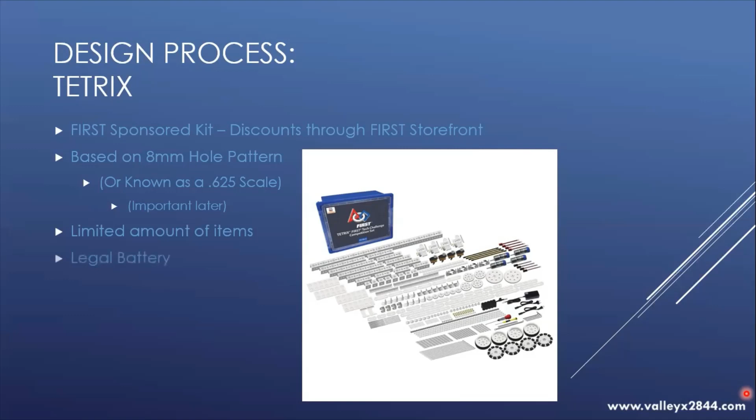With the kit parts, the first one we're going to go over is Tetrix. It's a FIRST sponsored kit, discounts through the storefront. It's based on an 8mm hole pattern, also known as a .625 scale. This is more important as we go down the list. The downside to it is it's very limited on the amount of items within the kit, but they do sell one of the legal batteries for FTC.

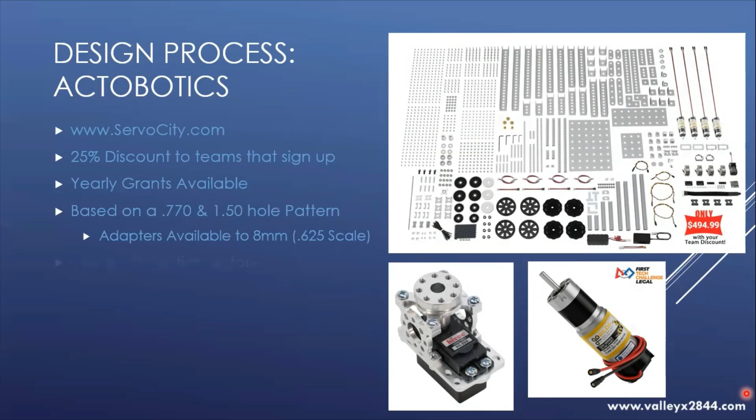Actobotics, which is a very big favorite of ours on our team, is from Servo City. They offer a 25% discount for teams that sign up. They offer yearly grants. They're based on a .770 and 1.5 hole pattern, but have adapters back to that 8mm or that .625 scale. They also sell the modern robotics motors.

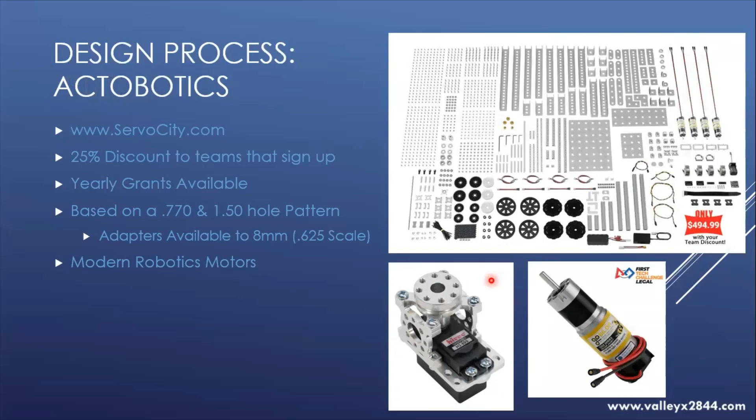One of the big items that we like on my team is the servo blocks. Servo blocks will save your servos from being damaged for the most part, depending on how you design your robot. But using a servo block, even if you aren't using Actobotics, will save your servos a tremendous amount of pain during the season.

GoBuilda, which is also the same company as Actobotics, is their metric version. You can find it at gobuilda.com. They also offer a 25% discount to teams that sign up. There's yearly grants that they give out, and they're based on an 8mm grid pattern. If you notice, that 8mm grid pattern is quite popular in FTC. They also sell the modern robotics motors that are legal in FTC.

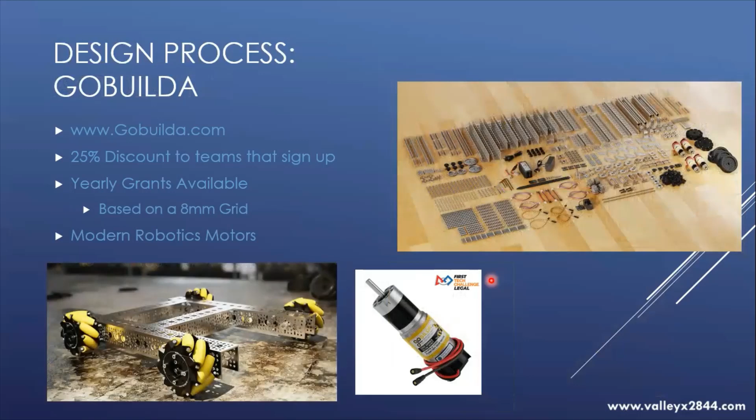We then get into Rev Robotics. Rev Robotics is a FIRST sponsored kit with discounts through the storefront. You can find more parts at revrobotics.com. In 2020, they're offering $25,000 in sponsorship grants that are available on their website. And they're based on an extrusion channel bracket system that also has an 8mm hole pattern to it as well, to allow you to cross-work different types of kits. All of these kits semi-work together based on the 8mm hole pattern. Takes a little bit of work, but you can definitely mix and match a lot of these different kits.

The difference between Rev Robotics and everybody else, they're based on a 5mm hex-based system, which means you have a minimal amount of set screws. And if you ask any veteran team out there, you will know that set screws are not your friend. They have motor and gearbox options available, and those motors also come with that 5mm output shaft.

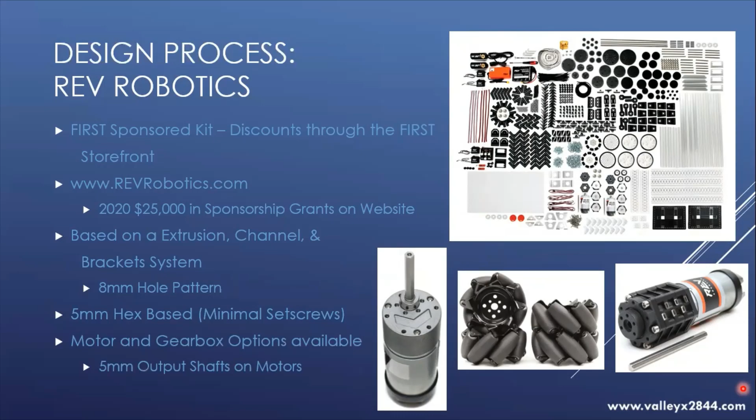AndyMark.com, which is also a FIRST Kit of Parts sponsor. You have the prefab TileRunner kit that you can buy from them. That comes in either a 6-wheel drivetrain, a Mecanum drivetrain, or a couple of different other options. You can see that right here up in the top.

They have multiple wheel options. Our favorite are the Stealth wheels. And even as a coach, these are some of the cheapest option wheels on the market and are some of the best wheels on the market. You can also get sprockets and different motors from a 3.7-to-1, 20-to-1, 40-to-1, and 60-to-1. They're typically stronger than your Tetrix motors in general, and are also based on an 8mm hole pattern.

As I said, there's multiple wheel options available. Let's take a look at the Stealth wheels here. You've got a gray, black, blue, green, and orange. If we look at the gray, those will last you more than one season. You could probably get through multiple seasons with those. The black will last you a season, and the blue will last you an event. I do not suggest driving the green or the orange wheels on your drivetrains.

At Valley X, when we drive with a 6-wheel drivetrain, we go with the black and the gray ones. If we know that there's a pushing match, we may switch to the blue ones. If you're going with a Mecanum drivetrain, at least with AndyMark, I would suggest the HD wheels. They do offer a much cheaper set of wheels, but to save yourself some heartache and pain, please don't go with these, as they break quite easily, especially in matches that have defense.

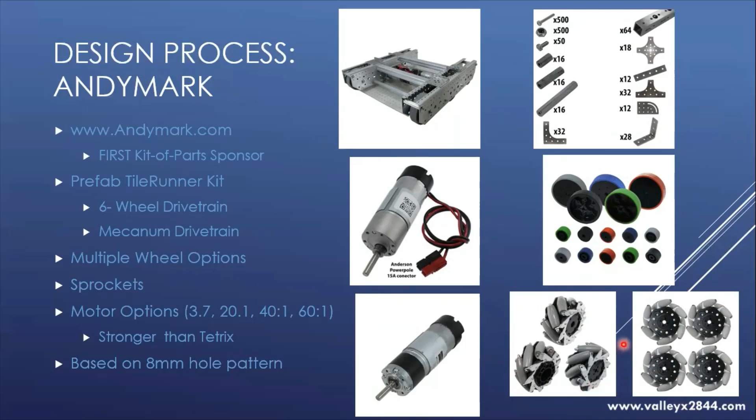Then we're going to get into the pros and cons of a kit of parts versus a custom build robot. What are some pros of a kit of parts? It's quick and easy to prototype. It's easy for more inexperienced teams. And the information is widely available online. Some cons though: the cost is usually higher and you're limited depending on the kit that you choose.

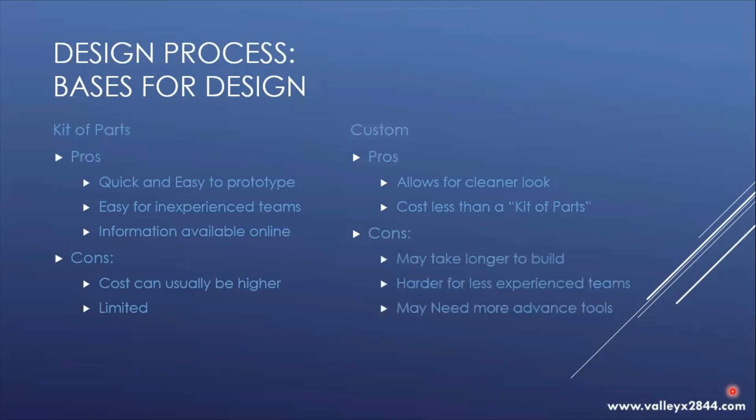With a custom, the pros are it allows for a much cleaner look and usually costs less than a kit of parts robot. Some cons though is it may take longer to build and is harder for less experienced teams. It may need some more advanced tools. With Valley X Robotics, our veteran team always runs a custom robot near the end of the year, but we also use a kit of parts for our prototyping and for our rookie team. Both ways of building robots are perfectly fine.

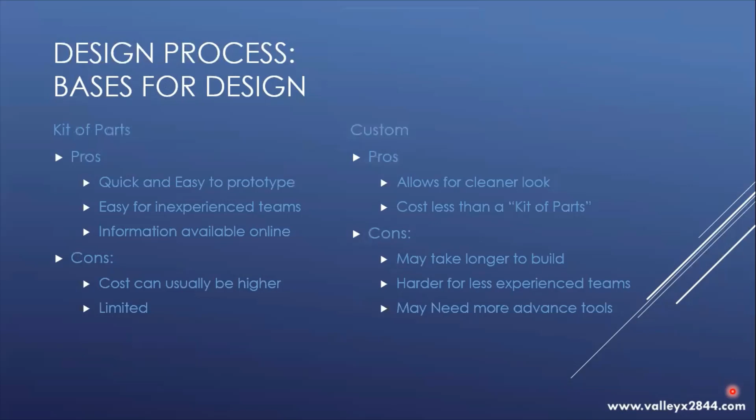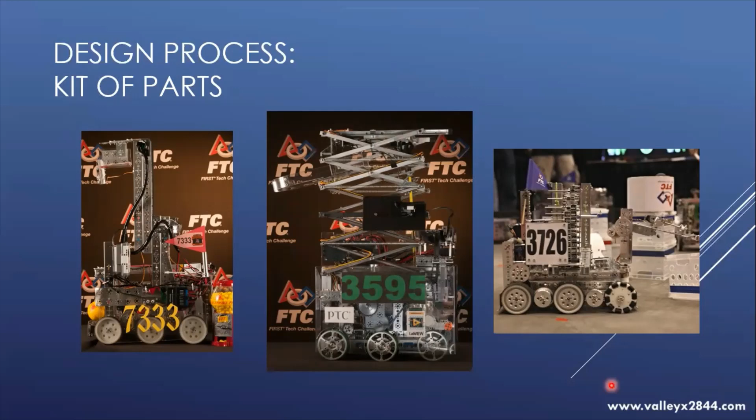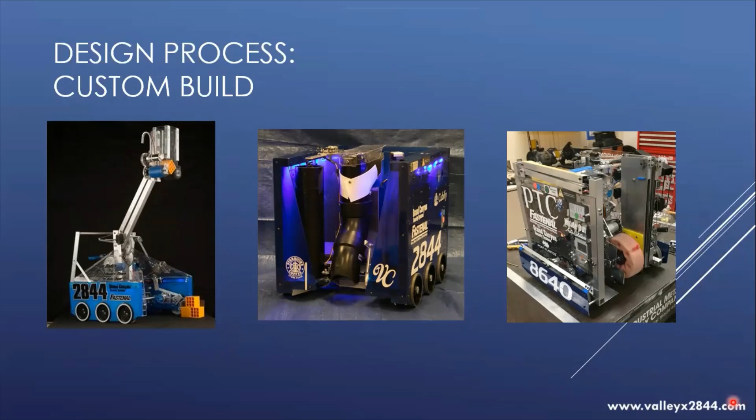Now we get into CAD. What is CAD? CAD is computer-aided design. There's two companies out there that sponsor FIRST teams, which are SolidWorks and PTC. And you may be asking yourself, why would I want to do CAD? Wouldn't you like to build your robot, test it, design it, and see if there's any issues before you ever build it, before you ever spend a dime? I know the coach's eyes just lit up.

Yes, you can completely build your robot, design it, make sure that there's no issues, and do multiple different things within the CAD software to see how your robot would look, perform, and act on a playing field before you ever have to spend one penny. Look into computer-aided design. From these two companies, you can get sponsorships and don't even have to pay for the software.

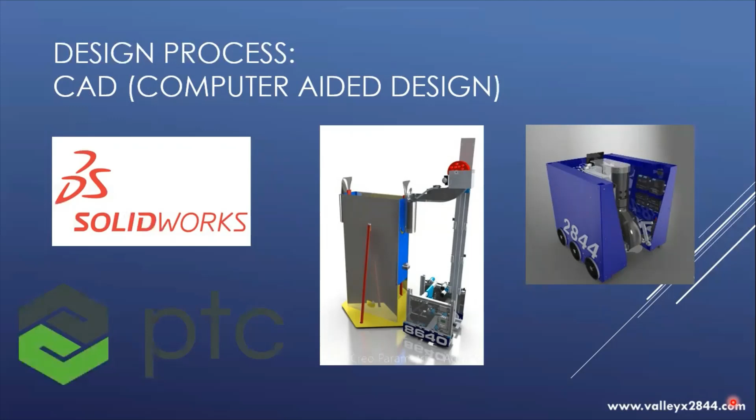Now we're going to get into SRA. For those veteran teams, you may know what I'm already talking about. It's the speed, the reliability, and the accuracy of your robot. For a robot to be high performing on a high performance field, you must have all three of these things. Without one, you're not going to perform as well as one that does have all of them. You need to have that speed, that reliability of your robot, and that accuracy of that robot and what it's doing.

We're going to put that up top, and we're going to look at design smart and smart design. And what do I mean by that? With design smart, you're going to design what is best for the manipulation of these rings and wobble goals this year. You're going to design your robot to have easy access to make sure that you can fix whatever breaks. And maybe you're going to even add adding and removing capabilities of either elements or parts of your robot, as well as the rings and wobble goals.

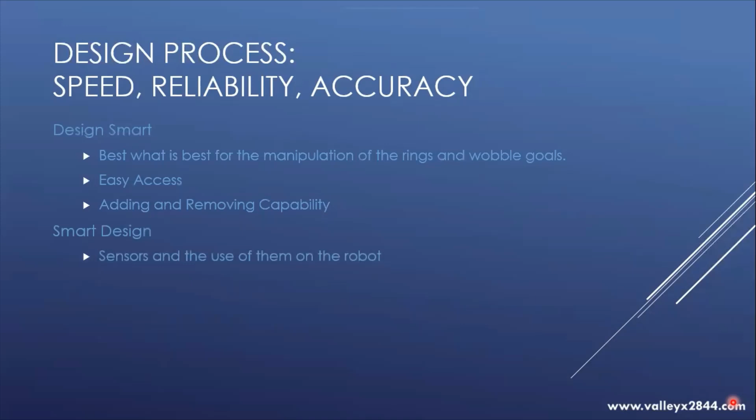Remember that you have to be able to get those out of your robot at the end of a match easily, or else you face penalties. With smart design, we're going to put in sensors and the use of them within the robot.

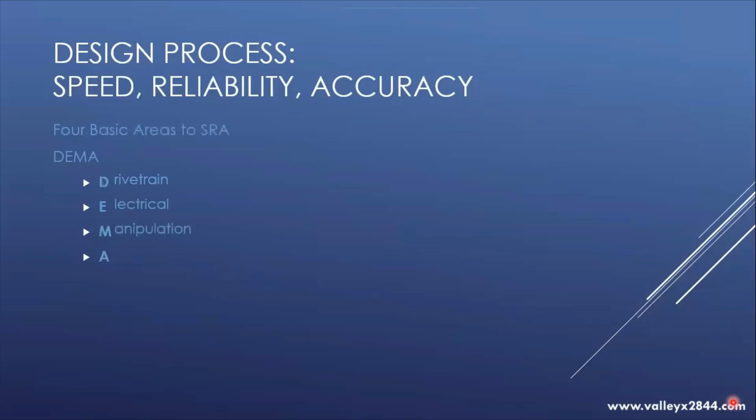Under SRA is what we call at ValleyX DEMA. DEMA is your drivetrain, your electrical system, the manipulation, and the automation of your robot. The drivetrain: one, it's the most crucial part of your robot. A weak drivetrain will destroy a robot.

Different types are wheeled drivetrains, tank tread drive, Mecanum, and Omni, and those are the four we're going to go over today. Why, you may ask, is this the most crucial part of your robot and maybe not my electrical system? Let's say you have the greatest electrical system in the world, but your robot's sitting on the floor with a wheel falling off. What's that electrical system doing for you?

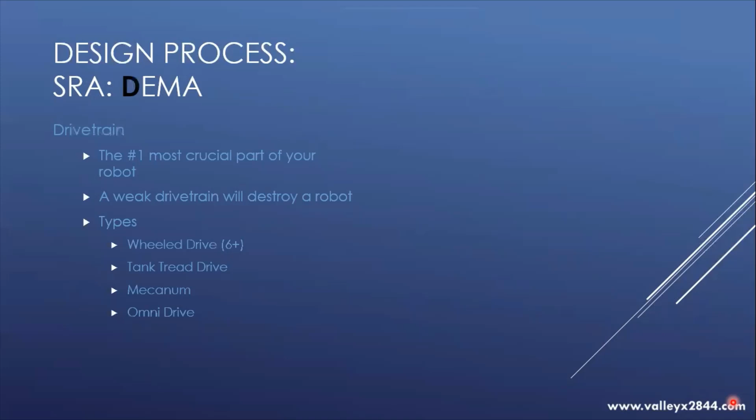You need to make sure that your drivetrain does not fall apart, and if it does, that it can keep moving and working on the field. So that great electrical system you have works perfectly. Make sure you can move around the field. Even if your manipulation fails, you can still play defense on the field and be a team that teams are looking at using in the elimination matches.

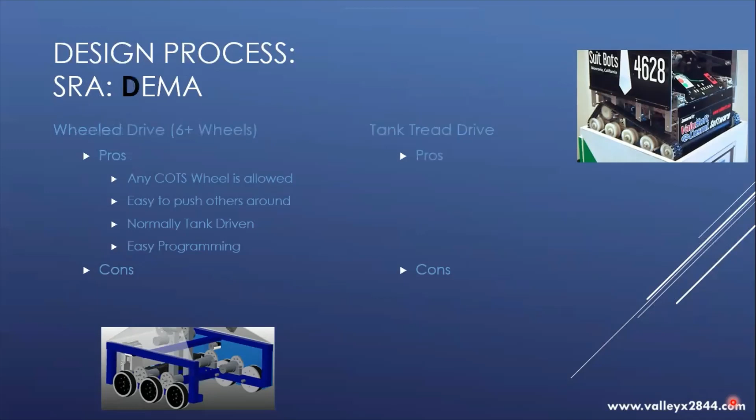With a wheeled drivetrain, we're going to go with 6 or more wheels. Some pros: any commercial wheel, for the most part, is allowed. Look at the rules to make sure that you're getting a wheel that is allowed. There's one at least that I know of. Some other pros: it's easy to push others around in defense, and it is normally tank driven. For your programmers, this is the easiest programming to do. Some cons though: it's harder to line up and there's harder movement around the field.

With a tank tread drive, some of the pros: the appearance is very inviting for most students. Traction against the pads is tremendous. It's harder to be pushed around when you're playing some defense. And again, that easy programming, it's normally tank driven. Some cons though: it's harder to line up. If you're using Tetrix treads, it slides on wood, paint, and plastic. And if you don't align them correctly, they will pop. And what happens if you lose one side of your drivetrain? You're driving in a circle or not at all.

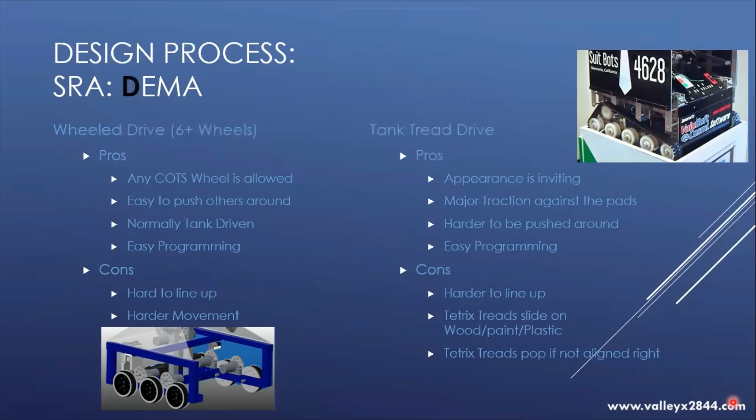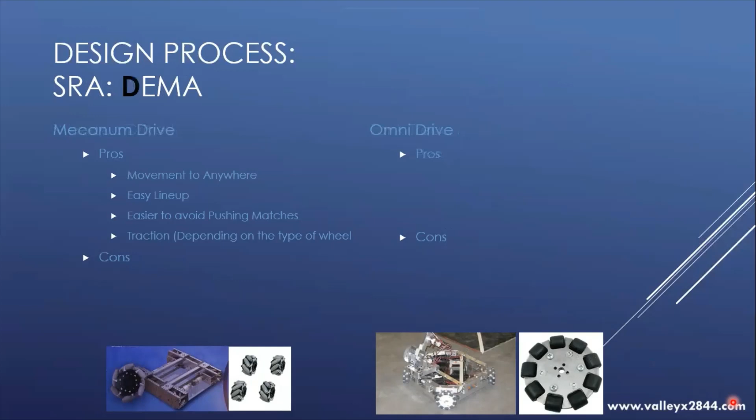Mecanum drive, some pros: you can move anywhere. It's easy to line up. It's easy to avoid those pushing matches. And if you go with the more expensive wheels, you might have some of that traction that we're talking about already. The cons, though, the better wheels are more expensive. If you don't have those wheels, as I said, it's easy to avoid pushing matches as a pro. So if you can, don't get into a pushing match, because one of the cons is easily being pushed around.

It does require a motor per wheel plus an encoder per motor. And for your programmers, it's pretty extensive on the programming. So that means, mechanical team, that your programmers need to have the robot from time to time. Even if you aren't going with a Mecanum or an Omni-wheel drive, make sure that you give your robot to the programming team so that they can program your robot. You can build the best drivetrain in the world, but if your robot can't be programmed correctly before an event, what's it going to do?

Some pros for an Omni-wheel drivetrain: it's easy to move around, it's easy to line up, and any commercially bought Omni-wheel out there is allowed. Some cons, though: it is the easiest robot to be pushed around. There's absolutely no traction, no matter what commercially bought Omni-wheel you buy. It slides easily on wood, paint, and plastic, and there's that extensive programming to make sure that it works correctly.

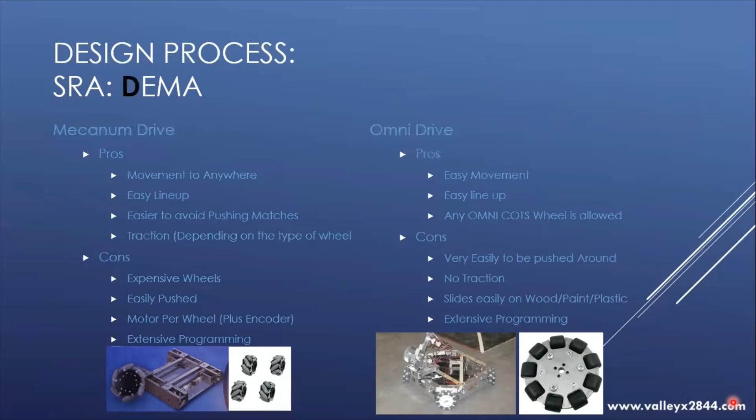Some power transmission for your robot, and what I mean by that is, how are you getting the power of the motors to your wheels? There's different types of ways. There's direct drive, belt and pulley, chain and sprocket, and gear drive. I'm going to let you look at these for a second.

Some tips: if you're going with a wheeled drivetrain, do 6 or more wheels and stay away from those 4-wheeled drivetrains unless you're going with Omni, Mecanum, or Swerve. The reason for that is, if you have a 4-wheel drivetrain and one wheel falls off, you're now driving in a circle or not at all. If you have a 6-wheel drivetrain and that wheel falls off, you still have 2 wheels on one side, so you can still drive around and play some defense.

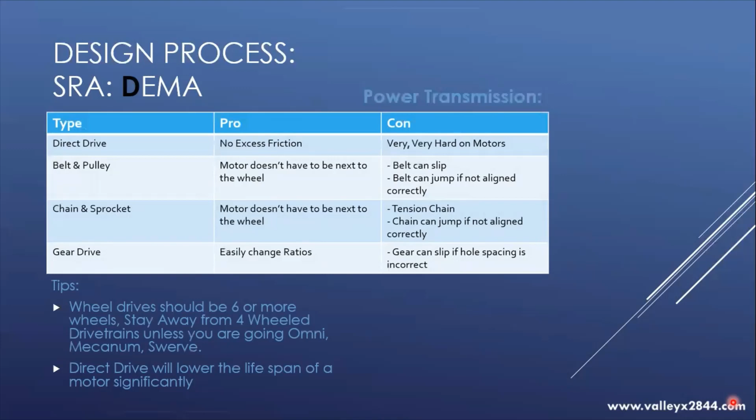Some other tips: direct drive will significantly lower the lifespan of a motor. It is more likely to break a motor. When you're building that drivetrain, try to stick with AndyMark NeveRest motors, Rev HD, or the goBILDA motors for your drivetrain. They're better performing than the Tetrix and the Rev Core motors. For higher speeds, use orbital motors, not spurs, and we'll get into what I mean by that in a minute. And for a normal speed, what most robots use is a 40-to-1 motor.

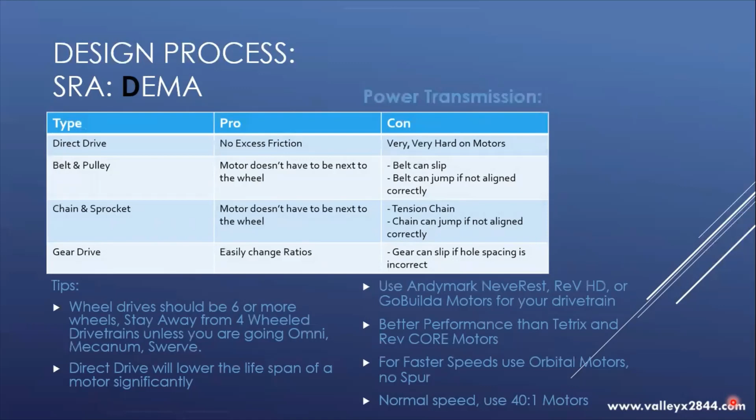Now we're going to get into the electrical system of your robot. This is the second most crucial part of your robot. You've now built a great drivetrain, so let's make sure that your electrical system is going to work how it should.

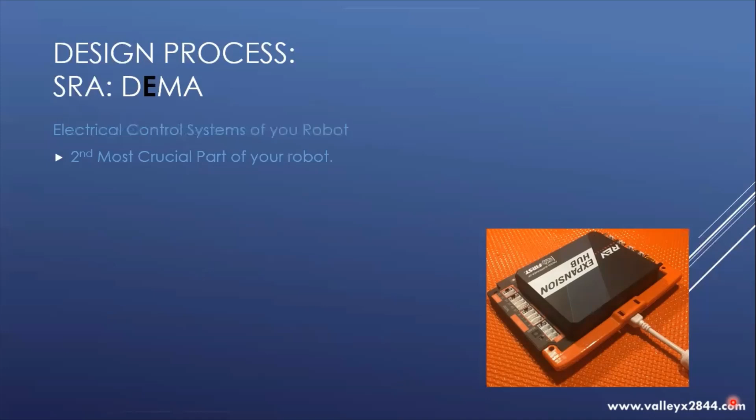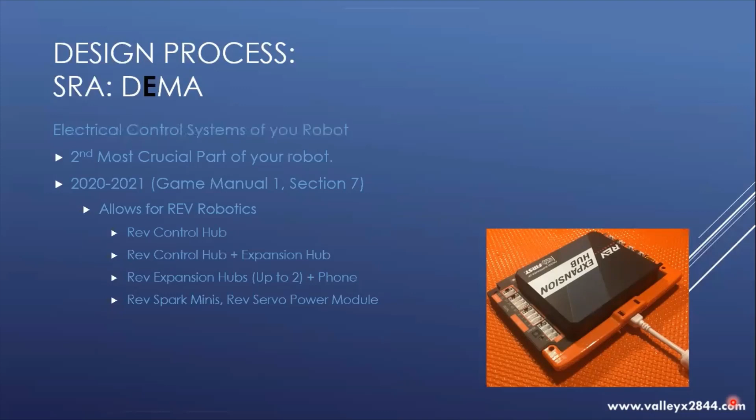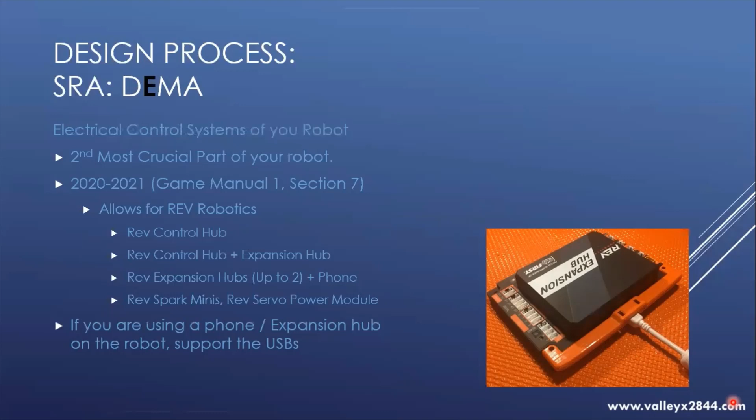For the 2020-2021 season, Game Manual 1, Section 7, allows for Rev Robotics. This allows for either a Rev Control Hub, a Rev Control Hub plus Expansion Hub, or up to 2 Expansion Hubs with a phone on the robot, and it also allows for the Spark Minis, the servo power modules, and the Blinkins that we'll get into later with the automation. If you are going to use a phone on the robot with an Expansion Hub and not a Control Hub, please make sure that you support those USBs so you don't have disconnections on the field and interruptions to your gameplay.

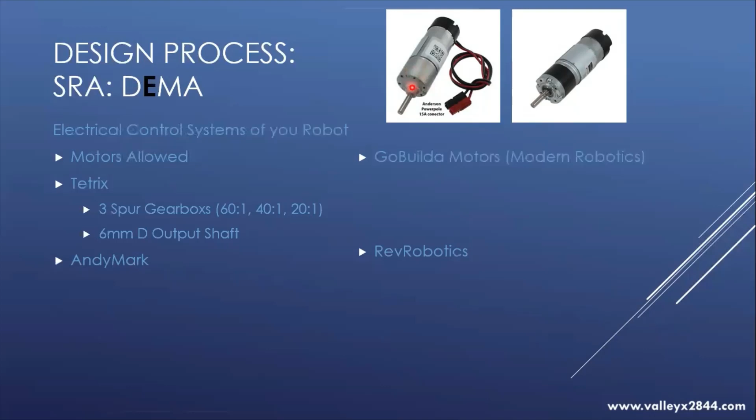The reason for this is that an orbital gearbox is basically a ring of gears that slows down the speed of the motor, whereas the gears inside of a spur gearbox are offset. When you need a stronger or faster drivetrain, the orbital gearbox is the way to go.

With AndyMark, there are 2 spur gearbox options, 60-to-1 and 40-to-1, and 2 orbital gearbox options, 20-to-1 and 3.7-to-1. They also offer a no gearbox option. They also offer the NeveRest Sport gearboxes, which have different gear ratios that you can choose from. And all of the shafts of these spur and orbital gearboxes have a 6mm D output shaft. goBILDA, or Modern Robotics, offers 10 orbital gearbox options ranging from 30 to 1620 RPM, and they also come with a 6mm D output shaft.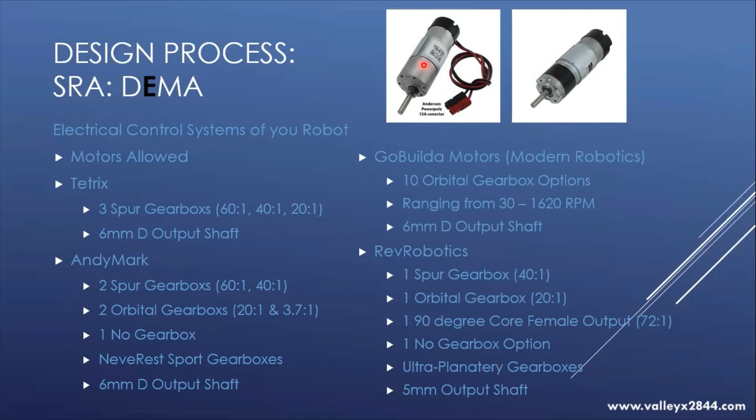Now we'll get into Rev Robotics. They have 1 spur gearbox option at 40-to-1 and 1 orbital gearbox option at 20-to-1. They also offer a 90-degree Core female output, which is 72-to-1. What I mean by female output is that it does not have a shaft coming out of the motor. You actually insert your own hex shaft into the motor to allow the motor to drive that axle. They also offer a no gearbox option.

They also have their own line of gearboxes called the UltraPlanetary gearboxes. Those allow you to choose what gears you want within the gearbox and assemble them together. The major difference between Rev Robotics and the rest of the motors on this list is that Rev Robotics comes with a 5mm hex output shaft.

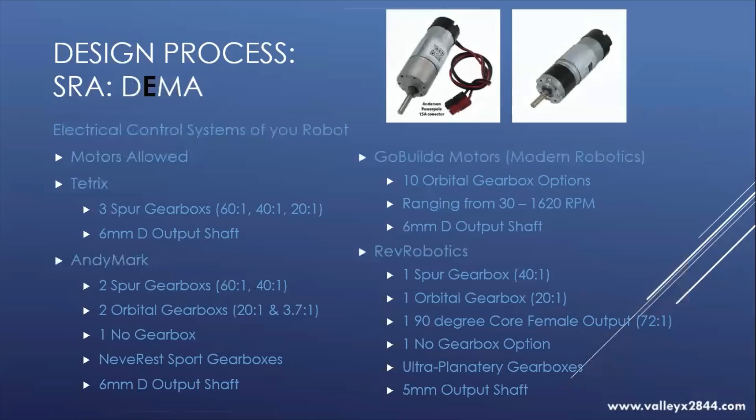From there, we're going to get into manipulators. The manipulators of your robot are the 3rd most crucial part of your robot. How are you going to handle the game elements? We've built a great drivetrain and we've built a great electrical system. Now let's build a great manipulator system. Some types we're going to go over are conveyors, telescoping lifts, articulating arms, and shooters.

With conveyors, we're going to go over 3 different ones here. We've got rollers, which use individual rollers, but this adds weight and complexity. The balls or the objects will usually go in a rotating pattern. We've got double belted, which use a pair of belts. It increases the size, but it also increases the complexity of the design, and it allows for that quicker movement of elements. And then we get into the single belted, which usually uses a slippery material on the non-moving surface.

Different places to find belts are McMaster, AndyMark, hardware stores, and there are other options out there as well.

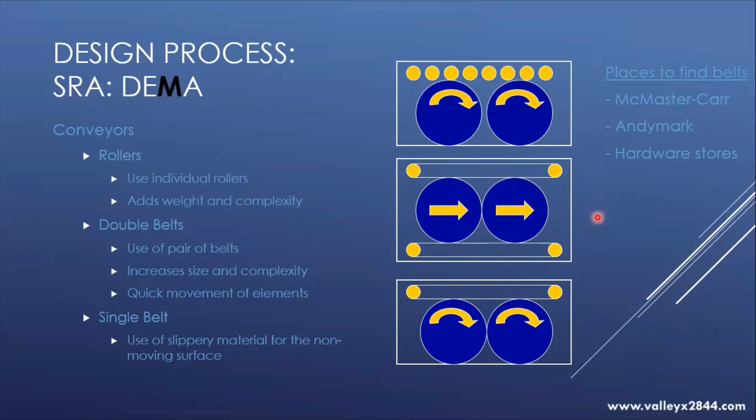Extension lifts. There's multiple ways to control these lifts. You can do it with a winch and pulley and a rack and pinion. We're going to go over winch and pulley in just a moment. Some cons, though, is there's extra weight due to the overlapping of each slide. It can be difficult to manufacture depending on how you're building your robot. And there's friction that can be caused with slide binding if you don't get the slides correct.

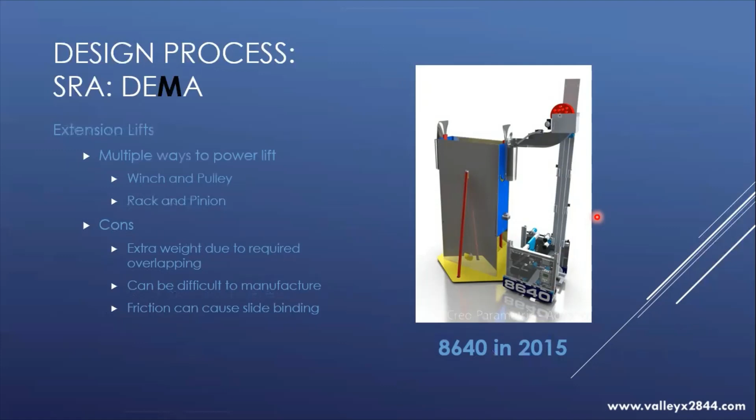Now with a winch and pulley, there's 2 different ways that you can wire your lift. You can wire it as a continuous or a cascade. The continuous, as you can see here, let's follow the red cable from the barrel. It's going up and over the tower and is completely winding through each and every slide up until the end effector, or the piece that is holding your object. We then use a yellow cable to pull down the whole system, so we do not rely on the gravity and the weight of our system to bring it down.

Cascade. The difference here is if we follow the red cable, it's going up and over tower 1 and is connecting to slide 1. We then have our yellow cable that's pulling down slide 1. The rest of the red cables, if we follow here, are attached to the top of the tower, up and over slide 1, connected to slide 2. And we go over here, we're connected to slide 1, up and over slide 2, and connected technically to slide 3 because this is moving up the lift as well.

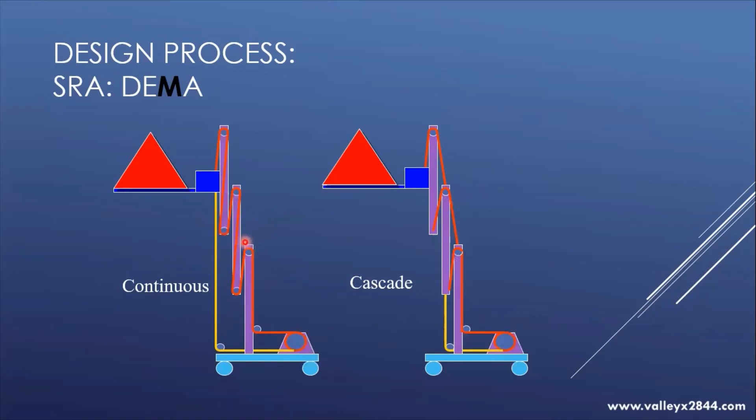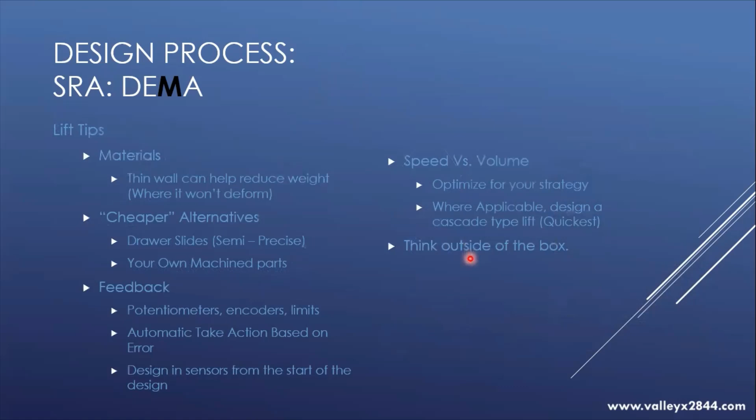Keep in mind the speed versus volume of your lift. Optimize it for your strategy. And where applicable, design for a cascade type lift. This is the quickest type lift, as all of the slides here on a cascade lift move all at once. So as this pulls it up, this one and this one are moving at the same time, whereas with a continuous lift, one moves at a time. And also think outside of the box.

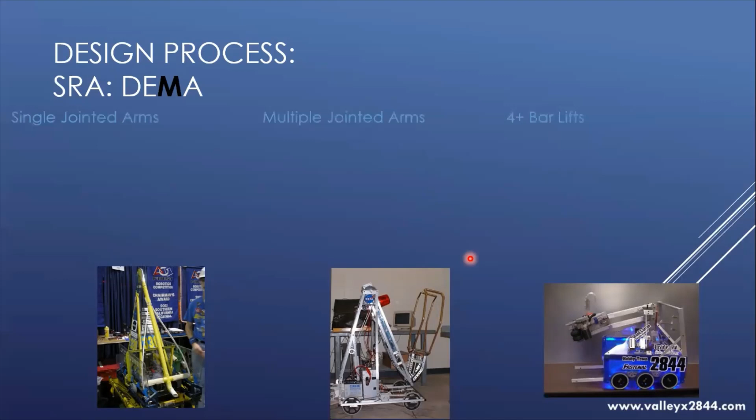Now we're going to get into single jointed arms, multi-jointed arms, and 4-bar lifts. Let's do this as an example. Take your arm and put it out. Now keeping your elbow and your hand straight, not moving at all, move your shoulder up and down. This is a single jointed arm. It has one shoulder joint, typically fixed end effector, or in this case, your arm or your hand. It is the easiest type to build, and it follows the KISS methodology.

Now let's move on to multi-jointed arms. Take your arm and start adding in the bending of your elbow and your hand. You've now added a degree of freedom, but that also added complexity. Every joint needs to be engineered. While it's easy for you to be moving your arm up and down and your elbow in and out, you have to think about how the operator is going to control the device on the robot. Make sure you design and put in those sensors to allow your drivers to focus on what is most important in the game.

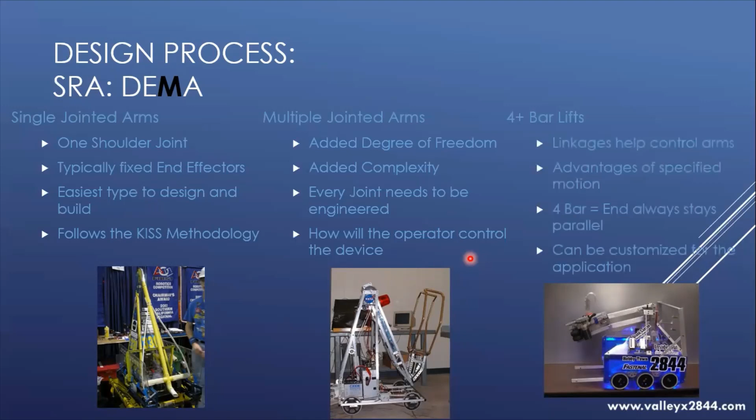We then get into 4-bar lifts. Linkages can help control arms. There's advantages to specified motion. With a 4-bar lift, the end effector in this case always stays parallel.

And you can customize it for any application depending on where you drill your holes. And what do I mean by a 4-bar lift? If we look here in this picture, we have the tower, which is underneath this shielding here. We then have a second and third bar. And then if you look right here, there's the 4th bar going up. These two arms stay parallel, and it allows this to stay parallel. So if this goes down, this end effector will still stay at that angle. If it goes up, it'll still stay at that angle.

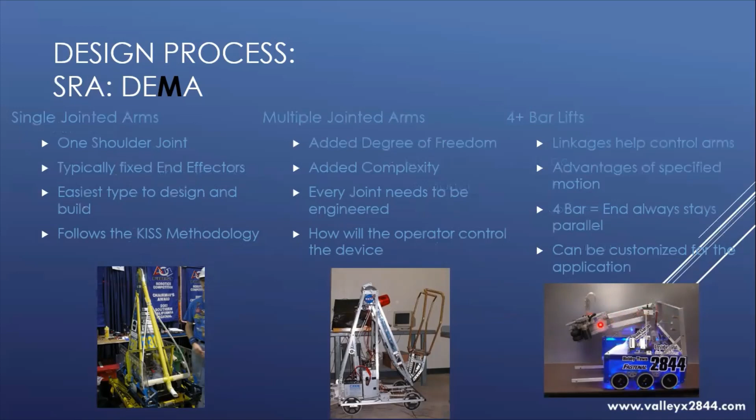Some arm tips. Where you can, use thinner walled material where it won't deform. I wish I had a picture, but if you look here, these arms used to be blue. We had to change it out for thicker material because after our first event where this robot was hanging, it deformed the arm. Every pivot point needs to be thought out and engineered. Every rotation point has different forces. Linkages can help control long arms, and maybe counterbalancing those arms to reduce the work on the motors to help save the motor's lifespan.

Keep in mind the operator interface. How are your drivers going to drive the robot? The KISS methodology, especially with arms, isn't bad. And keep in mind the feedback control is huge. Potentiometers, encoders, and limit switches help. That automatic take-back action based on error, and designing those sensors from the start. Think outside the box.

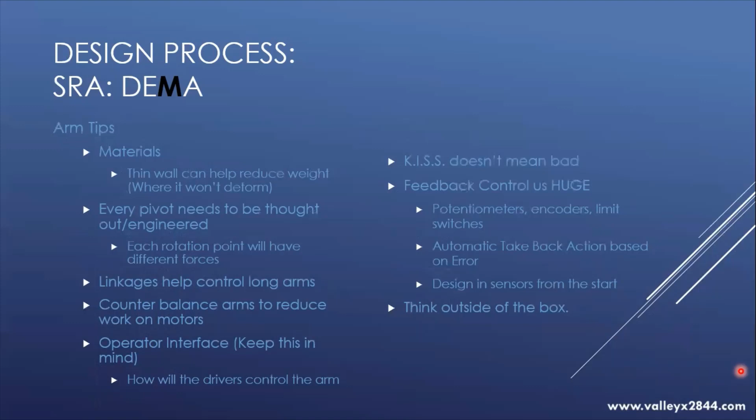Last but not least, we're going to get into shooters. I know everyone just went, ooh. With shooters, we're going to go over 3 major players out there. We have the flywheel, the double wheel, and the catapult. With a flywheel, it's typically one wheel fit within a hood. It launches items in an arc or it creates spin. The hood is typically fixed. The downside though is it's very complex to build.

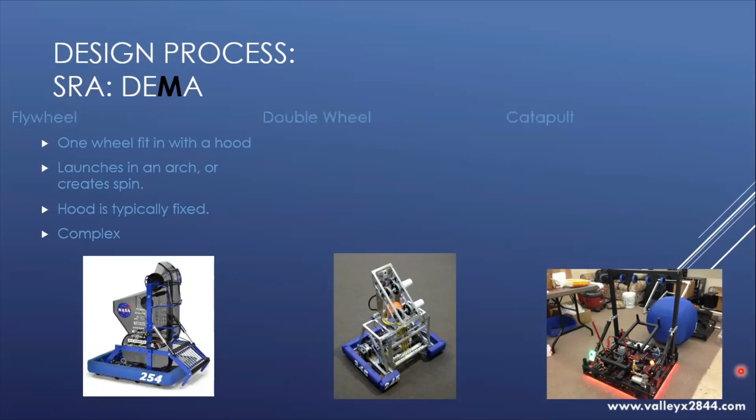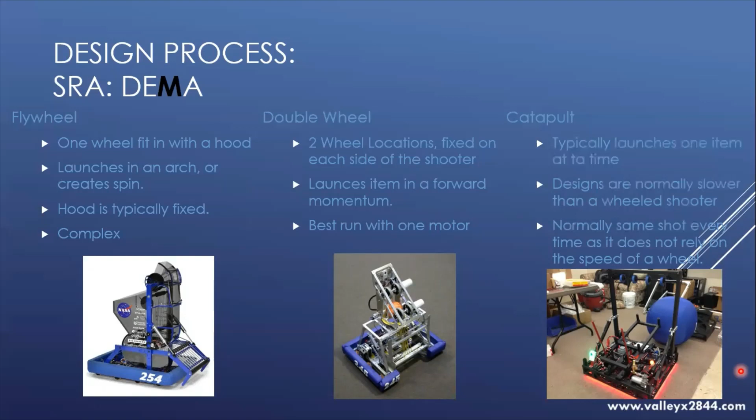With a double-wheeled shooter, the wheels are in 2 different locations. It's fixed on each side of the shooter. It normally launches the item with a forward momentum, not as much spin. It's best run with one motor or one set of motors to control both wheels. Having a motor per set of wheels that are not connected together can create a little bit of shock, which will wear out the motors quickly. On a catapult, it typically launches one item at a time. Designs are normally slower than a wheeled shooter, but the upside of a catapult is it's normally the same shot every single time, as it does not rely on the speed of the wheel.

Some shooter tips, and this goes for everything really, on your drivetrain, your electrical system, and the rest of your manipulation. Look at past designs. Look at both FRC and FTC. I'll give you guys a hint. With this year's game of throwing rings, look at Ultimate Ascent from FRC. Materials with shooters, build it strong. A lot of forces are happening. There is no weight limit this year, so build it strong.

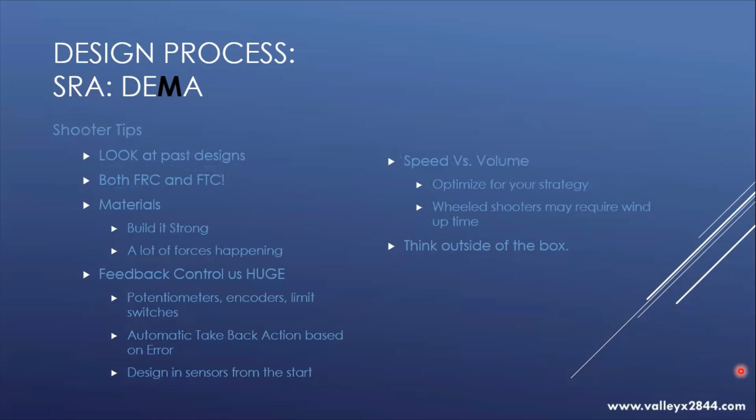Feedback is huge. Potentiometers, encoders, and limit switches. That automatic take-back action based on error. Designing your sensors from the start. Keep in mind speed versus volume and optimize it with your strategy. Wheeled shooters may require some wind-up time. Again, think outside the box.

Last but not least, we're going to get into automation. And automation is both for autonomous and teleop. Let the drivers focus on what is most important in the game. This means both, again, for autonomous and teleop. Now you notice I didn't put this as the 4th most crucial part of your robot. This is crucial for your robot to compete and work high in the field. That feedback coming back from these sensors helps those drivers focus.

The feedback from potentiometers, encoders, and limit switches can help speed up the robot, feeding into SRA. That automatic take-back action based on error feeds into the accuracy of your robot. It also feeds into the reliability of your robot. Design in the sensors from the start. Doing this will allow you to have the speed, the reliability, and the accuracy that your robot requires to compete on a high level field.